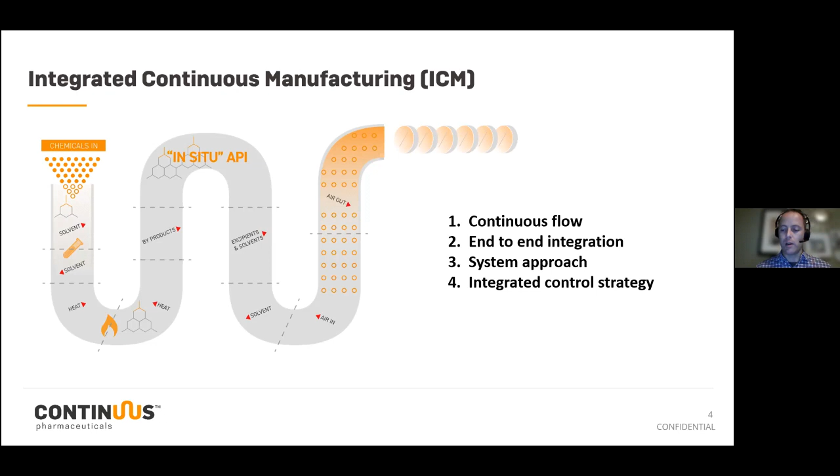That's very important, especially if you could have feedback control loops for the data you're collecting, to be able to provide feed-forward feedback control to maintain the homeostasis of your process. In the absence of that, it's almost like a Rube Goldberg machine where anything can go wrong.

So to jump into a case, and as you can see, this is a slide that chemical engineers like, we had a case where we had to produce an API, and fortunately this is an API that was produced in a single step. For the chemists in the crowd, it was a CN bond forming reaction. I'll just leave it at that.

Literally A plus B gives you C. Now, as a departure from Svetlana's talk, where everything runs in a tubular reactor, this is a case of flow chemistry that no one really wants to do. This is not a fast reaction. This is a reaction that has solids.

So again, DMF reflux, 10 to 14 hours of residence time. This is a reaction that produces solids, and a lot of solids. This is a highly concentrated process stream that has over 70% of solids in it.

Product C crystallizes out before full conversion, so you can't run it to full conversion in solution and then crystallize it out separately. It starts to crystallize out within like an hour.

So no amount of tubular reactors will save you in this case. Like Svetlana's, it's a highly exothermic reaction, and the crystallization is also highly exothermic.

And also this product, just for information, it's a high volume generic, and we were asked to design a line that would produce over 10,000 metric tons a year. And I'm not kidding, this is one of the top 5 produced drugs in human history in terms of mass, and it's not acetaminophen, it's not ibuprofen, it's not...

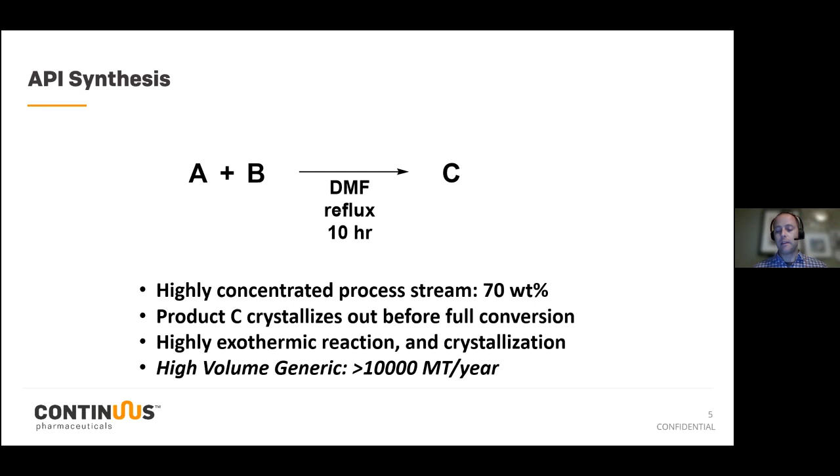So this is the footprint of the pilot plant where this work took place. So just for reference, this box on the left next to the gray box, those are 2 back-to-back 2-meter fume hoods.

So these are bathrooms, but here we have a series of process enclosures where we landed equipment for each of these unit operations. So the first enclosure is a dissolution enclosure where we added the raw materials from these bag dump stations here and here.

These were pneumatically conveyed, one of them milled and pneumatically conveyed into gravimetric feeders, which fed into a dissolution vessel. One of the raw materials had some insoluble impurities that needed to be removed. So that pre-reaction mixture solution went through a continuous polish filtration that we designed and developed.

The resulting pre-reaction mixture went into a CSTR cascade for the reaction, a 5-stage CSTR cascade where the reaction and crystallization happen. Subsequently, we filtered the material on our continuous filtration system, resuspended it, and then fed that into our continuous dryer, something we also had to develop ourselves.

This dry API, at this point, we used PAT to measure all of the critical quality attributes. Everything was in spec for the API, and it was pneumatically conveyed to the next enclosure, which for EMC stands for extrusion, molding, and coating, where we're able to make tablets. I'll show you that very briefly.

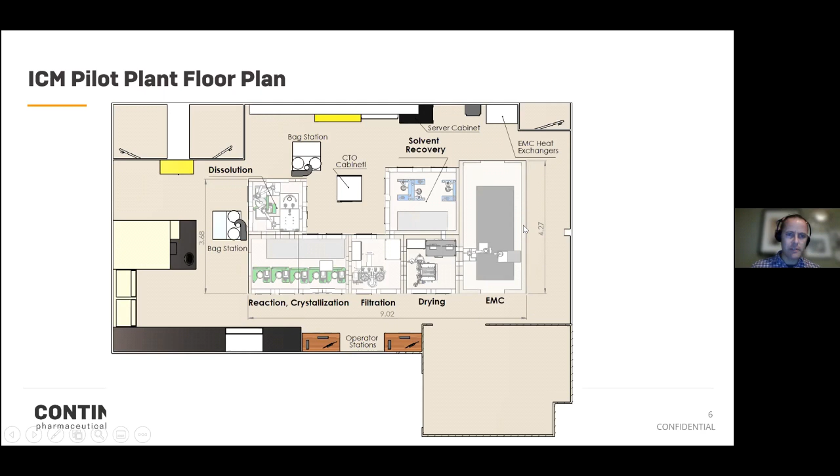So here's a PAT overview and a process flow diagram. Again, the raw material feeds come in, they go into a dissolution vessel, and we clarify it through a continuous polish filtration. We have our 5-stage CSTR cascade. In the last vessel, we land some PAT for process understanding, but not for measuring any critical quality attributes.

We go through our continuous filter, and then we resuspend the wet cake. This enables us to monitor the main impurity down to ppm level in real time.

We then feed this into our continuous dryer, a drum dryer, and this material, once dried, goes through an airlock where we're able to measure residual solvent content by NIR, confirm the crystal form by Raman, and also use laser diffraction to measure the particle size. That was another specification for that.

The material was then fed into a twin screw melt extruder where we were feeding in an excipient blend of the inactive ingredients. The blending step, which is what extruders do, was able to mix this blend to the correct content uniformity, which was measured by NIR.

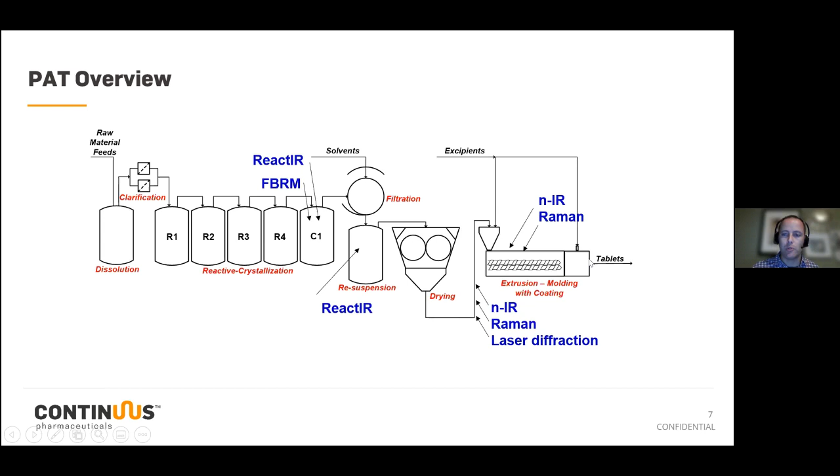Because this is a hot melt extrusion and we wanted to maintain the crystallinity of our API, we had an inline Raman to confirm the crystal form of what we were producing. And then we just injection mold tablets on the back end of that.

So again, this is what the pilot plant looks like from the front end. Here you can see these CSTRs - these are 10-liter jacketed vessels.

Again, it looks like a batch vessel, but you can actually run these in series, so you can handle solids and flow and slurries and flow. These were all connected to recirculating heat exchangers and peristaltic pumps.

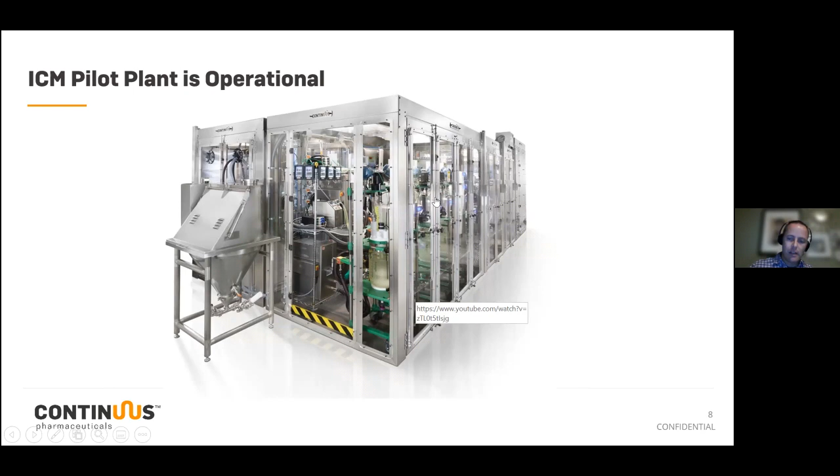Looking a bit more deep dive into it, we received our raw materials in 25 kilo bags, and these were pneumatically conveyed into pneumatic receivers, then dropped on call into gravimetric feeders, which meter A and B with the correct stoichiometry into a 20-liter jacketed vessel, which we're also feeding DMF into as the process solvent.

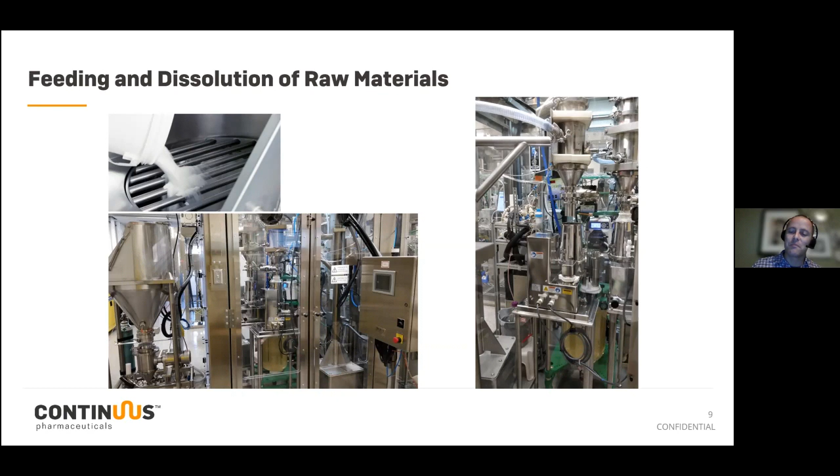At 70%, remarkably, this solid goes into solution at 80 degrees C, and the reaction doesn't happen yet, which is important. We continuously polish filter this stream - we want to remove that ash, that insoluble impurity in the process stream, because going into the reaction and crystallization, you cannot filter that out afterwards. So it's important to get it out beforehand.

So here, these are just your simple T filters. I think Svetlana is using something similar. Again, it's important to measure the pressure across these - as the pressure goes up...

What we did was we had two in parallel, and when the pressure got up to a certain level where we knew we were entering a nonlinear region of pressure increase, we would automatically switch to the clean and readied filter element. The compromised one, now isolated, could be backwashed, cleaned in place, and prepped fully automated. That way we can run these back and forth, giving us continuous polish filtration.

And this was done - they would automatically trip for at least this process about every day and a half.

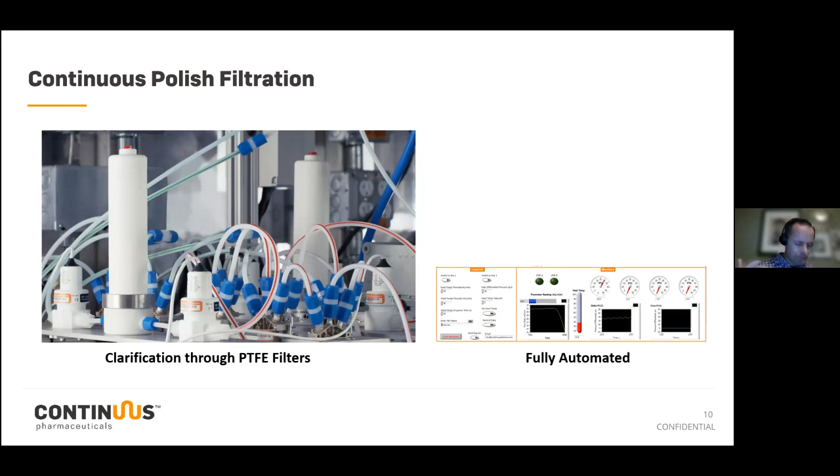So again, it's a 5-stage CSTR cascade. With PAT, we have mid-IR and FBRM in the 5th stage.

These are fancy pictures of silica and water for the Italian film crew when they took pictures of this. In reality, when you're running at 70% concentration for this process, it looked like a hot, corrosive milkshake. These pictures look prettier, but you can imagine it's just a thick thing that would never flow through a tubular reactor. I wish it would flow through a tubular reactor, but this was a viable, robust solution that scales very well for the residence time and conditions we were looking at.

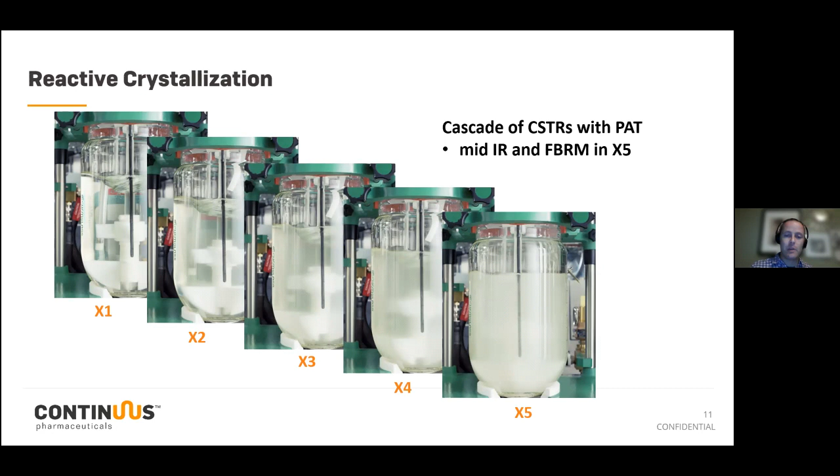So for continuous filtration, this is what it looks like from the bird's eye view. It consists of a porous metal plate, and here comes the process stream. We pump here. We have an oscillating motor here, which just helps us get a good spread of slurry along the radius of the plate.

This plate rotates clockwise, and along these radii we have wash blocks. We have a vacuum that pulls, it's just vacuum filtration, pulling the mother liquor through, and these wash blocks wash clean solvent onto the wet cake, displacing the mother liquor and purifying it. Here's another view where you can see these wash blocks. You can heat the wash blocks if you want.

And this wet cake would get removed through the combined action of a scraper blade and auger. This would then get conveyed into a resuspension vessel. We do this for a couple reasons. One, for regulatory purposes, if you did a thing, you have to prove you did it. So this is a purification step, and we want to measure the purity of our API.

So we landed a React-IR probe here to measure the amount of impurity still in that mixture with respect to the API. Second reason, this enables us - our dryer operates on a thin film evaporation principle, a lot like a thin film evaporator or a rotavap. So it works better to convey material as a slurry, and also our dryer works better if it's a slurry instead of just a pasty cake.

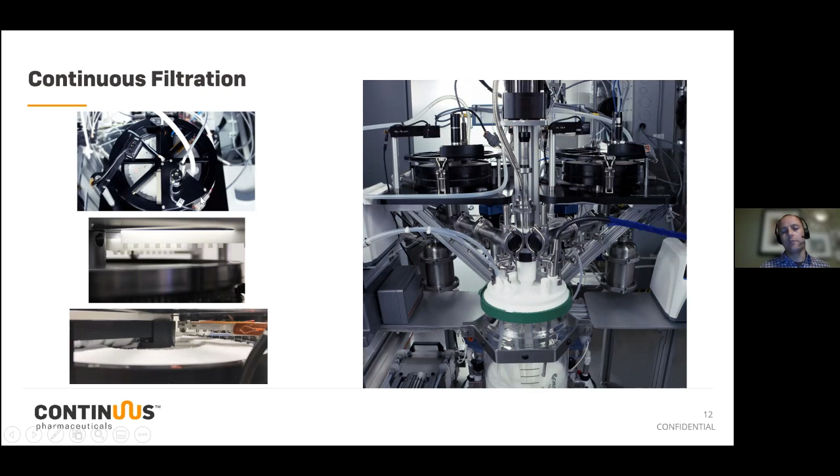So the next unit up is our continuous drum dryer. You can see 2 stainless steel drums, they co-rotate inward. Here's the slurry being applied to the middle. The residence time in this is about a minute, sometimes less.

And it dries it to ppm amounts less than the spec, or within spec, for all of the solvents that we put through it. The drums are electrically heated on the inside, and then the chamber that it's in, we can place under vacuum. So much like a rotavap where you can control temperature and also put it under vacuum, we get very efficient evaporation.

The material upon drying flows through and drops, goes through a cyclonic separator, drops through an airlock, and that gives us an opportunity to use PAT to measure the residual solvent content of the API by NIR, the particle size distribution using a Malvern Insitec system, and also the crystal form by Raman.

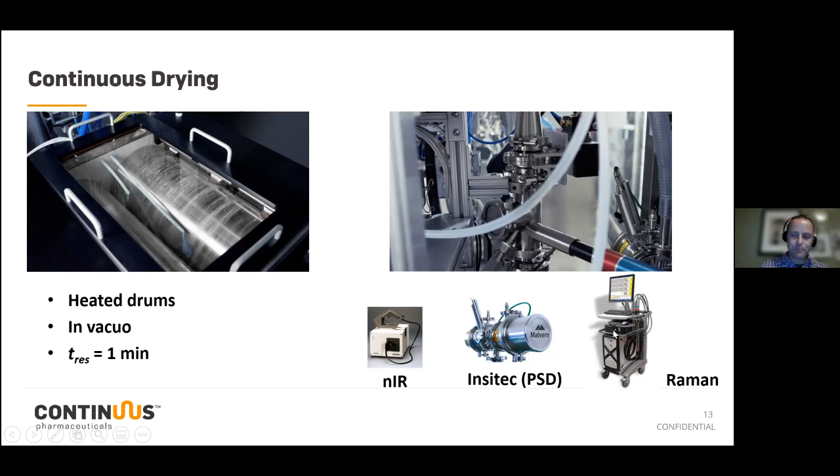I'll just move forward briefly, but the extrusion molding coating system - we call it 3-in-1 product manufacturing. Essentially you have a gravimetric feeder where you can feed your API into this. You've got your excipient, which then comes into this here, and you can see it feeds into this hopper. A twin screw melt extruder, it's kind of like the way pasta or Play-Doh is made, and it will blend the excipient with the API to give you the right content uniformity, and then we injection mold tablets. These are conveniently dyed our company's color, orange.

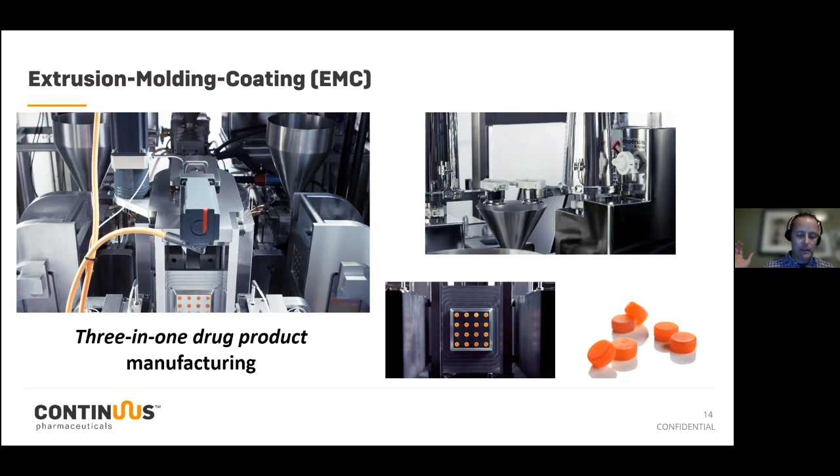And it puts out tablets. The residence time through this is about 10 minutes, so very quick all the way through. It's important to be able to balance this all out when you're viewing a systems approach to this. So at this point, I'd like to pivot.

Currently we're located in Massachusetts, and rather than outsourcing our manufacturing to another country, we're building this manufacturing facility. It's about a mile from our current R&D labs. From the back view, you can see we've got storage tanks for solvents, and there's a lot of other utilities in here.

In addition to us being able to produce API in this facility, we're also producing drug product, since we like everything integrated—not just tablets, but also sterile injectables too. That would be sterile injectable solutions in vials.

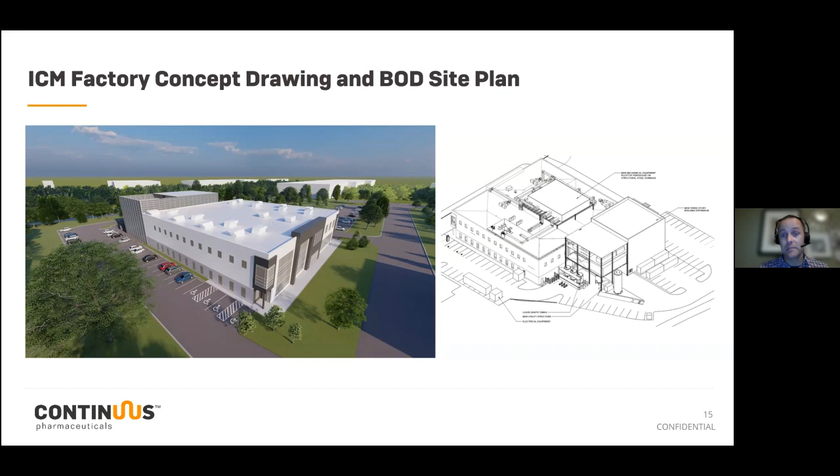We recently this year, thanks to the pandemic, received a large US government contract to produce 3 APIs and integrate that with formulation, fill, and finish for vials. These 3 APIs are very interesting—they're all sterile injectables, 2 of them are highly potent, and 1 is a controlled substance. That's made our R&D life a little interesting, and also going through the whole permitting process. We just got our DEA license, which is exciting and also scary.

Just to describe some of the chemistries briefly that we'll be doing for the manufacturing of these 3 APIs: there's acylation and alkylation, we have a continuous Grignard formation and use, there's a condensation reaction, we're doing asymmetric hydrogenations in a packed bed—kind of like a nice paper from AstraZeneca where they did this in OPRD, and we're doing it in that fashion—reductive aminations, and also dynamic kinetic resolutions.

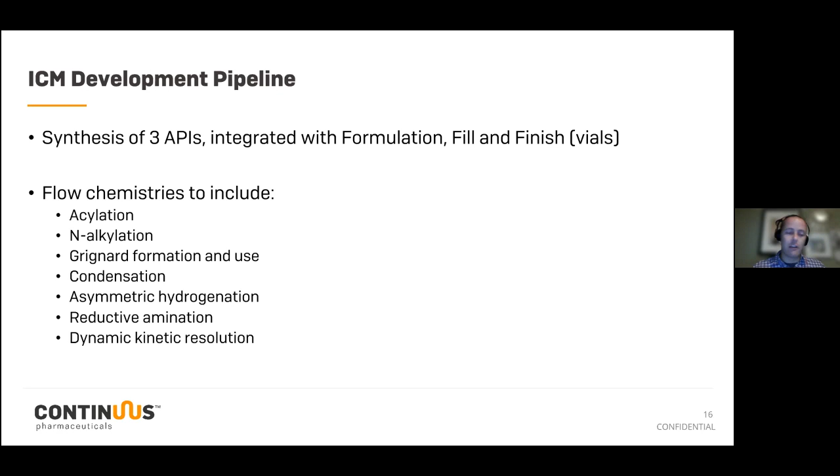With that, there are some additional things we needed to develop. If you recall that filter you saw, you can look into it. Because now we're going to be working with highly potent materials, there are 2 things that are very important: engineering controls, like a closed system that doesn't contaminate everything else around it, and 2, the ability to clean in place. That's very important, and I'm going to take a page out of Svetlana's book about doing riboflavin testing for proving your cleaning validation. That's important because you don't want your highly potent controlled substance getting into your other drugs in a multi-product production facility.

This is just a CAD picture of our rotary filter for the manufacturing, our drum dryer—2 drums, looks fairly similar, just kind of looks like it's on steroids. And then these are placed in an isolator, so that when you're generating a million doses an hour, for every couple hours' worth of highly potent substance, you can be safe and protected from it.

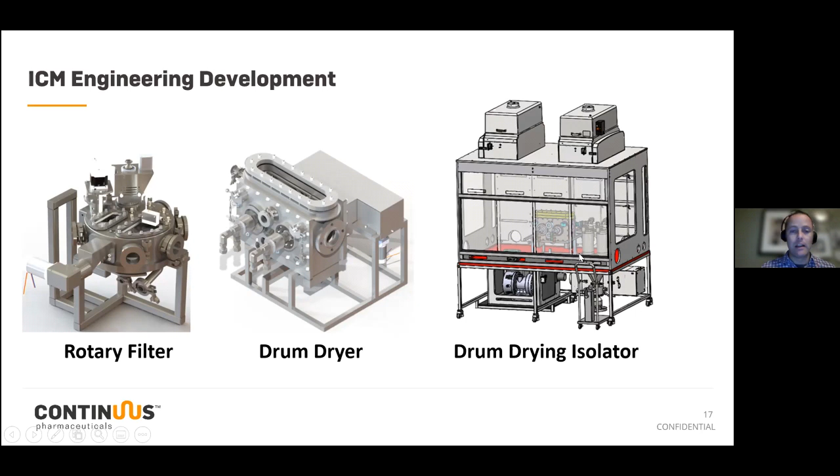All of this is very important, and how we're growing as a company. We've accomplished this end-to-end integrated continuous manufacturing at the R&D pilot scale, and we've advanced this with potent compound capability. Working with the US government, the Department of Defense, and Health and Human Services, we're implementing the first US multi-product full CGMP factory, which will be ready in 2023. We'll be able to manufacture and sell essential generic medicines, as well as provide CDMO services for innovator drug companies. With that, I want to thank you for your attention, and I look forward to any questions you might have. Thank you.

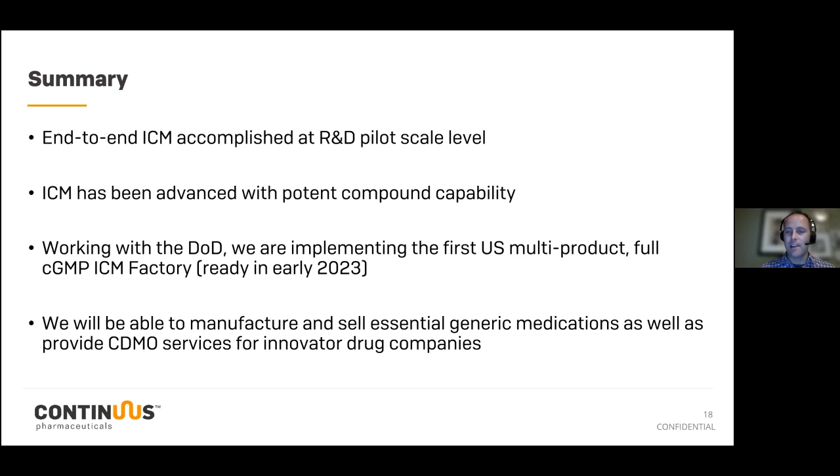Thank you very much, Stephen. That was truly a fascinating talk, seeing how you integrate all these individual unit operations, all these processing steps, in a really end-to-end continuous production facility and production capability. I'm sending out another request to everybody online that's still listening to us—if you have any questions, please fire them through. And here they come. There's a first question coming in from Dipali Arora.

What level of control was obtained over the crystal morphology? Was there any particle aggregation observed in flow, and what product quality control was implemented? It's a 3-in-1. Yeah, that's a good question.

So in general, we want to control crystal form, crystal size, crystal shape. In this case, because we were constrained by the economics of this process, when people run this, there is no control over crystal shape or crystal size. When you run at this scale for such highly exothermic and concentrated conditions, you're running at such high supersaturation that it's kind of ridiculous—there's no control over it.

The only thing you can do is stir fast enough in these vessels, and it's done at the manufacturing scale, so that you don't get incrustation. However, I think you get to a certain point where you're running so concentrated that the bulk mass of your process mixture actually kind of wipes the insides of your crystallizers clean. So it's kind of self-anti-fouling to a certain degree.

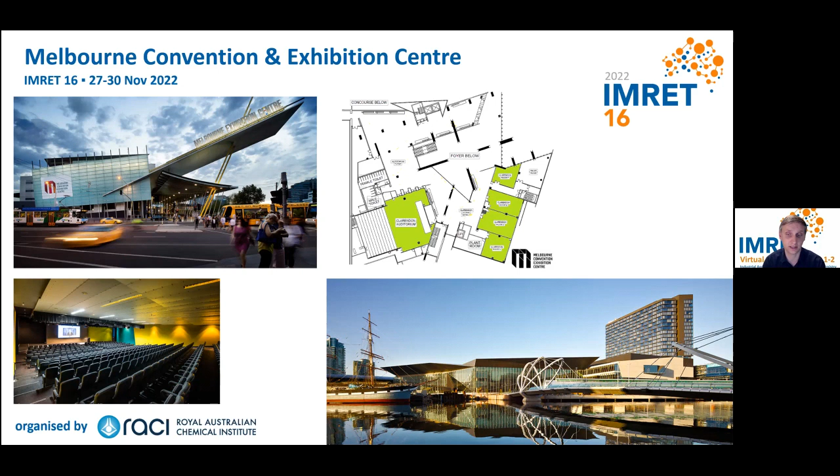In terms of the themes, it's a very broad spectrum of different themes for IMRET 16. So there'll be classical topics such as microfluidics and microreactor development and new systems. There'll be themes that speak to the pharma sector, the fine chemicals manufacturing, but also more recent emerging or recently developing applications, such as in the energy space, using microreactors for CO2 utilization or for hydrogen.